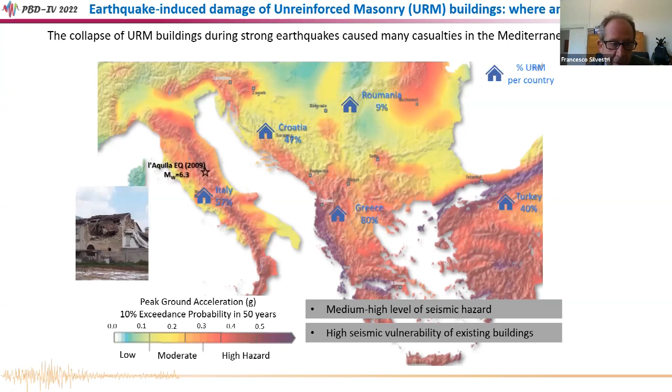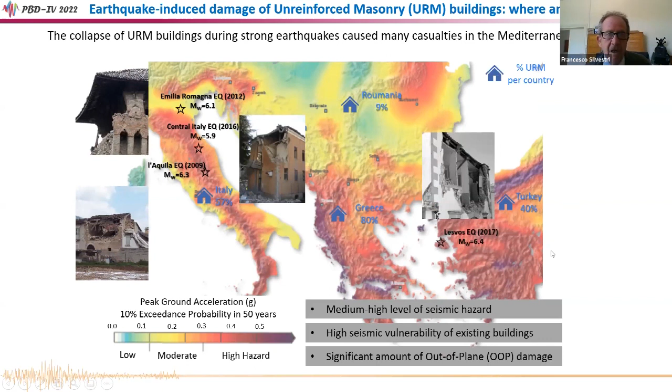Most of these buildings are made of unreinforced masonry, and as these representative pictures show, a significant amount of damage is due to local out-of-plane collapse mechanisms. Therefore our objectives were...

...to address soil-foundation-structure interaction, which is typically overlooked for this kind of building characterized by shallow foundations, so there can be a chance of considering this mechanism for a more reliable assessment of the performance of such buildings in terms of two main aspects.

The first is how to cope with methods referring, for instance, to response spectra for pseudo-dynamic analysis, which assume that the structure can be approximated with a single degree of freedom system, accounting for the complexity of masonry buildings, which makes it hard to approximate them with a single degree of freedom system.

Moreover, how can we estimate the effects of soil-structure interaction on the increase of the fundamental period of such systems, which can help for a more reliable assessment of the seismic inertial load acting on them, which can be either detrimental or beneficial depending on the part of the spectrum the period falls on.

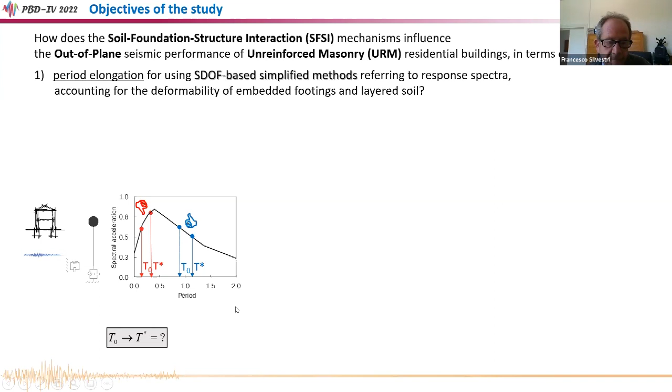So our first objective was to find a simplified method to predict the variation of the fundamental period for compliant-base models with respect to fixed-base conventional models.

The other aspect we tried to investigate was defining seismic fragility curves accounting for site amplification and soil-structure interaction, expressing the probability of attaining a given damage threshold at increasing intensity measure of the reference input motion, which must be defined and optimized to get a reliable prediction of expected damage from a synthetic parameter representing ground motion.

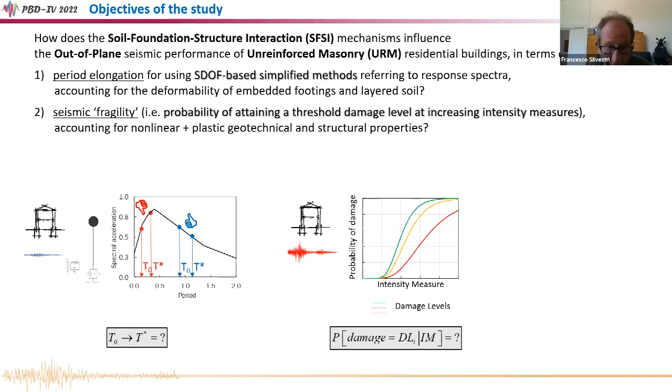In both cases we not only developed our procedures but also tested them on well-documented case studies. So for each aspect, I will resume the procedure we developed and show you the assessment on the case studies shown in these pictures.

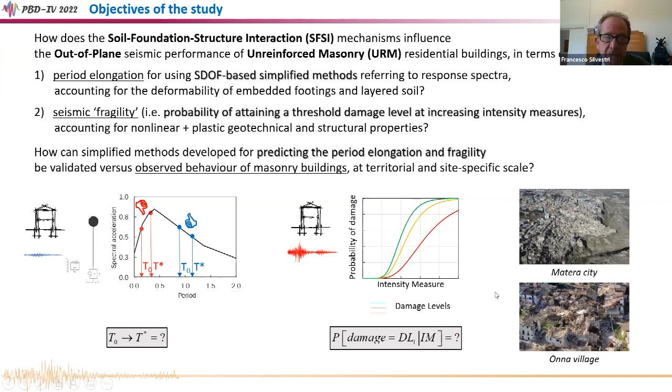The first step was to represent a cross-section of a masonry building, which is very complex due to the distributed mass and stiffness in the structural elements, the embedment of the foundation, the presence of intermediate walls, and layered soil as the foundation soil.

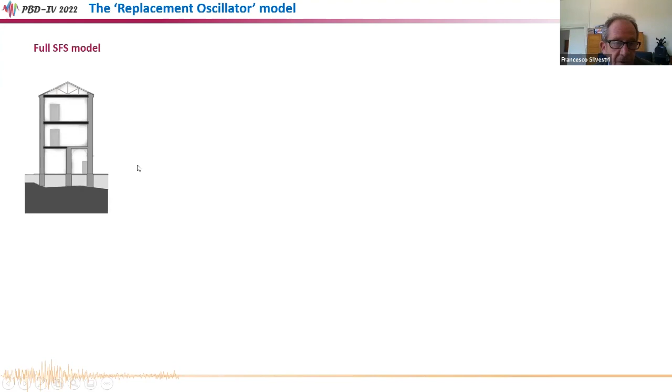So the first challenge was to find equivalence criteria to approximate this building as a compliant-base single degree of freedom system characterized by lumped structural parameters and impedance components.

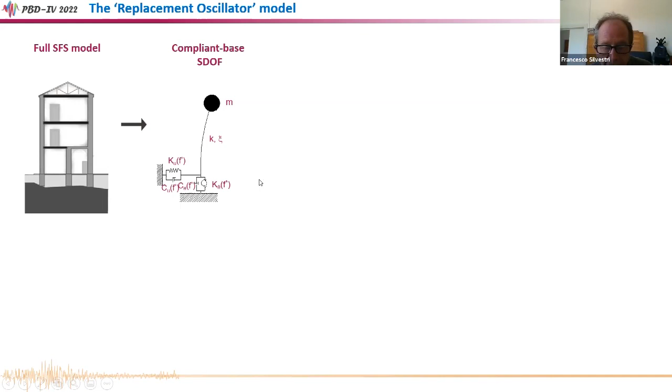These are frequency-dependent functions representing both swaying and rocking foundation-subsoil compliance, and thereafter to transform it into a replacement oscillator characterized by a fixed base and modified values of the lumped parameters.

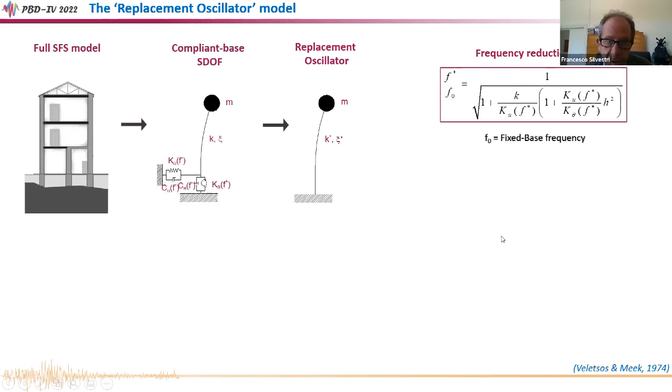An alternative procedure, suggested by the same authors, refers to simplified charts where, for a given structural slenderness ratio given by the ratio between the height and width of the structure, it is possible to predict the frequency reduction ratio by simply knowing the soil-structure stiffness ratio, defined by the ratio between the shear wave velocity—assumed, for the simplified approach, to pertain to a homogeneous soil model—and the fixed-base frequency and height of the equivalent mass of the structure.

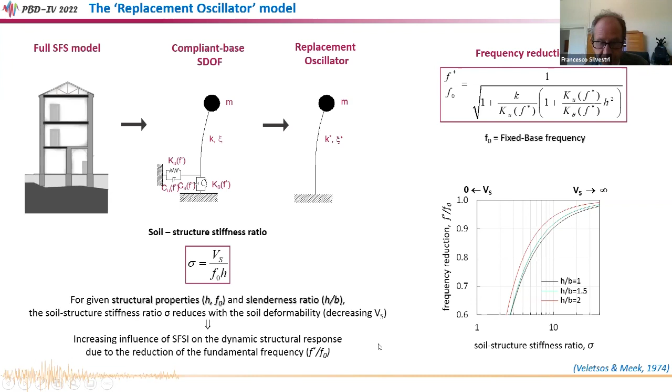So we tried to calibrate this method by means of parametric analysis. Here you can see two typical examples of building-foundation-subsoil models, with the building represented by load-bearing walls whose thickness decreases with height.

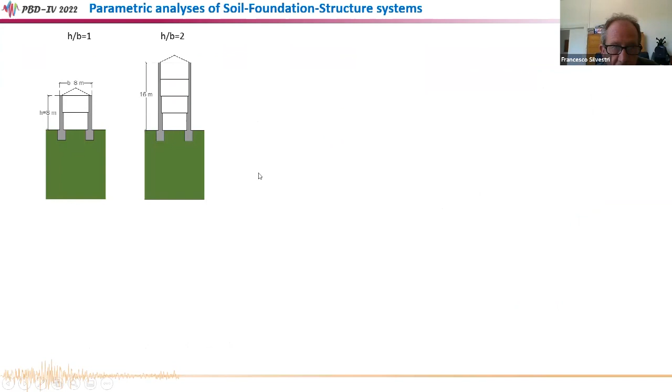The soil profile was first assumed homogeneous, characterized by shear wave velocity pertaining to the widespread ground type classification criteria suggested by international codes. For the softest soil model we also tried to assess the influence of heterogeneity in terms of the variability of shear wave velocity with depth.

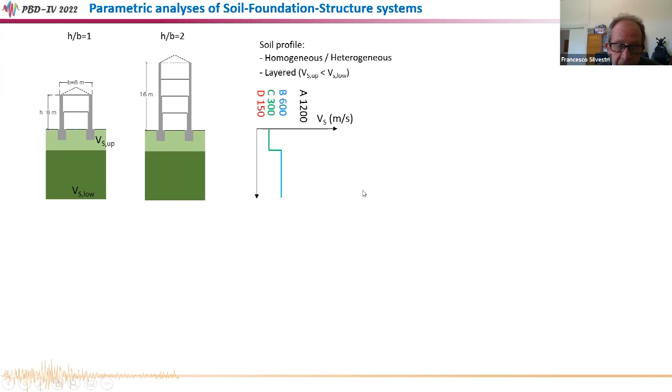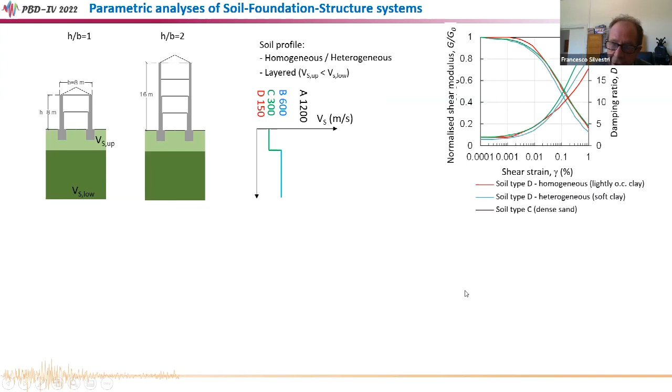And then we further consider a layered soil model to approximate actual conditions of soil heterogeneity. For the nonlinear analysis adopted for the assessment of fragility curves, we assumed a hysteretic plastic behavior for the soils.

With reference to the assumption of standard curves for defining the variation of normalized shear modulus and damping ratio with shear strain, and with reference to the material assumed for the masonry buildings, we selected three kinds of masonry types, which are the most widespread in Italy and, I guess, in other Mediterranean countries, characterized by reliable parameters representing their stiffness and strength as measured on load-bearing wall panels in the laboratories or suggested by the technical codes.

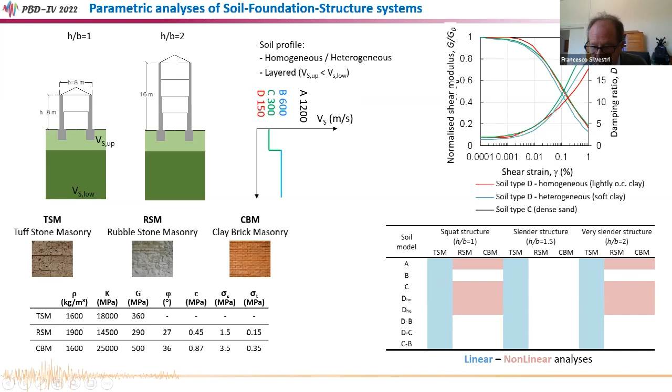So here in this table you can see the combination between all the structural slenderness ratios H over B, the type of masonry material—tuff stone, rubble stone, and clay brick masonries—and the soil models we adopted for the analysis. Not all the combinations were used for linear and nonlinear analysis, but they were enough to assess our method on the case studies I mentioned before.

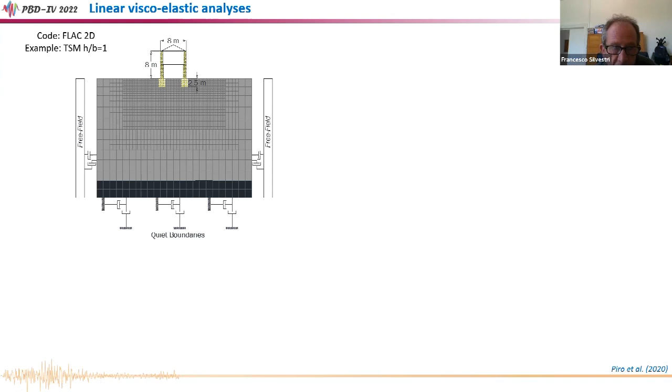So I can first show you the typical results of viscoelastic analysis. Linear viscoelastic analyses were used for a kind of dynamic identification of the frequency response of the building-foundation-soil models. Here you can see the typical mesh we adopted for FLAC two-dimensional analysis. This example is relevant to a tuff stone masonry with a rather squat shape ratio.

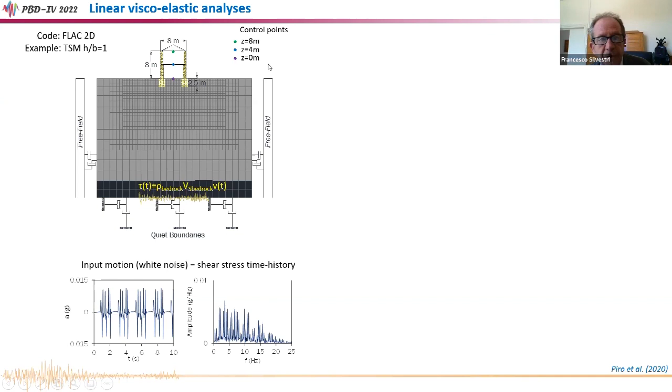And in this analysis, being the model linear, we just considered white noise as an input motion applied at the base of the soil model in terms of shear stress history. We monitored the response of the building and the soil by simply assuming three control points located on different structural elevations and at ground level. Here you can see four different examples of the time histories of the control points, corresponding to as many soil models, from top to bottom.

Here you can see the results of an analysis relevant to rigid soil conditions, which correspond to the fixed base hypothesis for the structure, stiff soil profile B, soft soil C, and very soft soil. These plots on the right represent the normalized Fourier transform of the free vibration, which helps to identify the fundamental frequency of the systems.

Please note that the soil free field frequencies computed analytically are in most cases reflected by the secondary peaks of the Fourier transform, whereas the main peaks observed here are those of the structure with a rigid base in the first case, and a compliant base with increasing deformability of the soil. You can see that although the variation is not as significant as that of the free field soil behavior, the decrease is anyway not negligible at all, which means that the soil-structure interaction is significant for this kind of model.

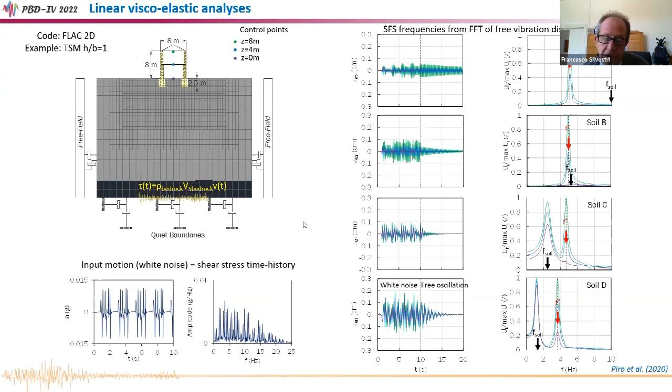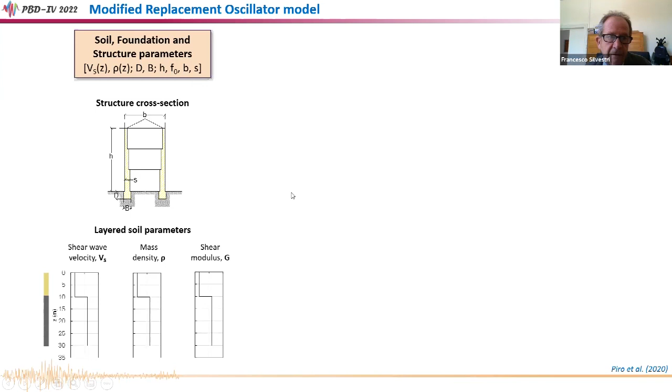Using the results of the numerical analysis, we recalibrated the replacement oscillator model. Starting from a structural and subsoil model characterized by a limited number of parameters listed on the left part of the slide, we could calibrate weighting coefficients which help in defining a weighted average of shear stiffness and inertia mass of all the materials involved in the volume significantly affected by the inertial soil-structure interaction mechanism, which consists of the embedded foundation—typically having the same properties as the load-bearing walls—and the soft soil cover.

And the underlying stiffer soil, for the case of layered soil—or in any case, even in the presence of more than two layers—we can extend this procedure to obtain the weighted average of stiffness and equivalent stiffness and mass density.

With those parameters, we could define the equivalent shear wave velocity, which can be substituted into the conventional expression of the stiffness ratio suggested first by Veletsos and Meek, in order to use the same kind of charts and obtain a prediction of the frequency reduction ratio, and therefore of the period increase ratio, which is different from that obtained by the oversimplified hypothesis of a homogeneous subsoil model.

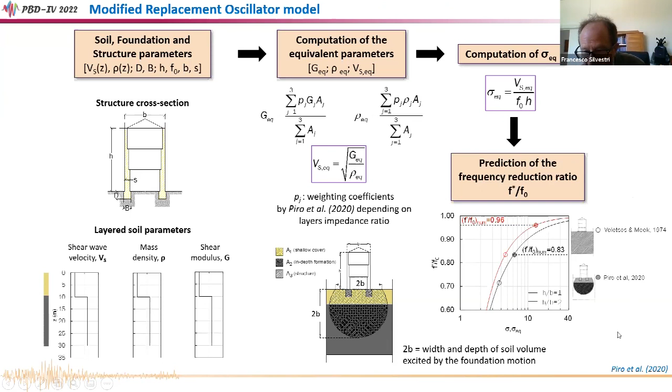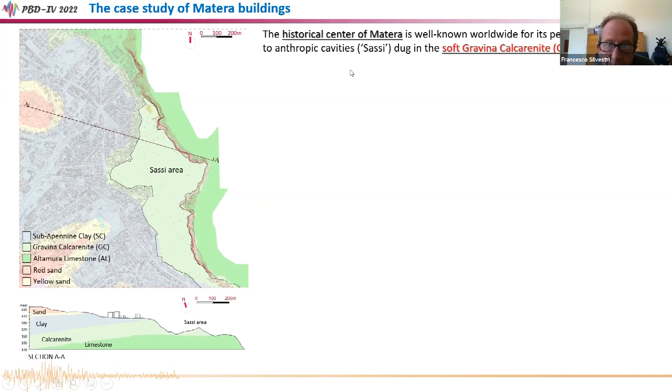So we tried to assess this procedure on a case study: the subsoil and building stock of the historical center of a very nice city in southern Italy, well known worldwide for its particular environmental heritage, characterized by the existence of a number of anthropic cavities dug into a soft calcarenite formation. But our interest was not in that area, but in the most inhabited area, built on the ridge of the Sassi areas.

And it is characterized by a high number of masonry buildings. In this area, thanks to cooperation with researchers of the National Research Council, we could rely on the availability of a number of reliable investigations in terms of borehole logs and geophysical tests.

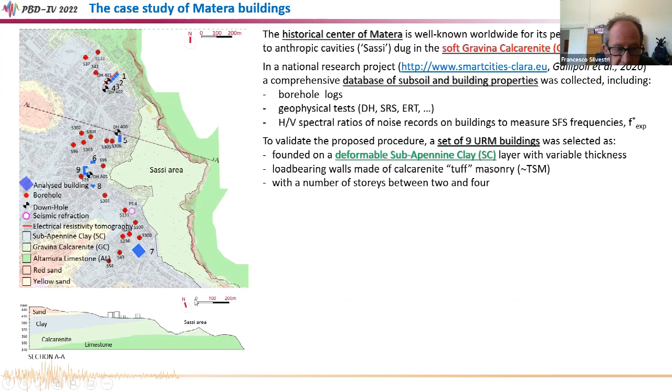We also performed our own downhole tests and electric resistivity tomography, but especially we had the availability of a high number of experimental measurements of soil foundation structure frequencies taken on buildings and processed in terms of horizontal to vertical spectral ratio. So we selected a representative sample of 9 unreinforced masonry buildings, all of them founded on the deformable clay layer lying on the calcarenite soft bedrock, with variability of clay thickness which overall increases by going away from the Sassi area.

For some of the buildings investigated by the National Research Council, founded directly on the calcarenite formation, we had the measurement of the natural frequency by horizontal to vertical spectral ratio. By fitting these measurements of experimental frequencies against the height of the building, we could get a relationship which for us represents the reference estimate of the fixed base frequency of the building with a given height.

Whereas, while plotting the experimental frequencies of the buildings founded on the clay, the frequency resulted significantly lower, and they are as much lower than the fixed base values as the thickness of the clay formation increases.

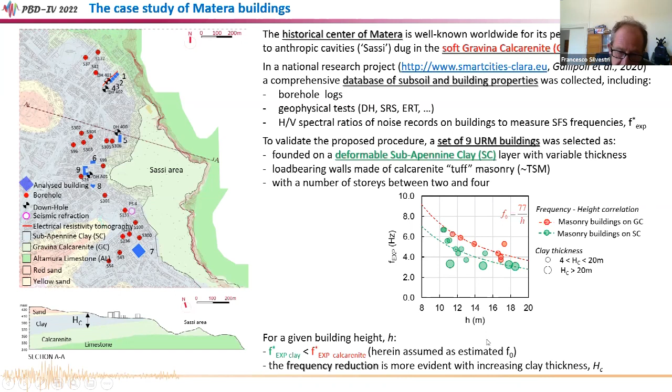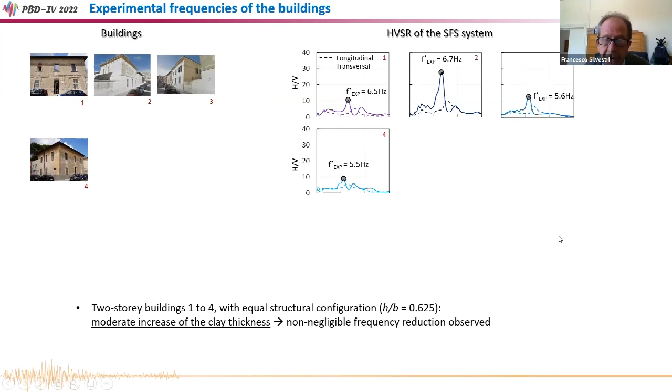Here you can see a set of pictures of the buildings we adopted, at least in this study, to assess our procedure. You can see here a set of 4 very similar buildings with the same shape ratio, which is quite low, and a moderate increase of the clay thickness of the layer. For them, even with this relatively low variability of subsoil condition, still a non-negligible reduction of the frequencies was observed.

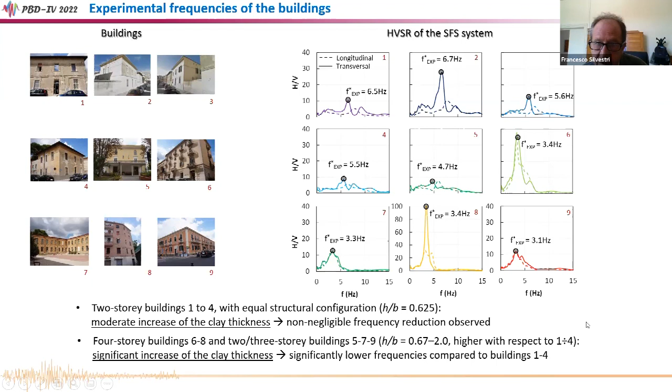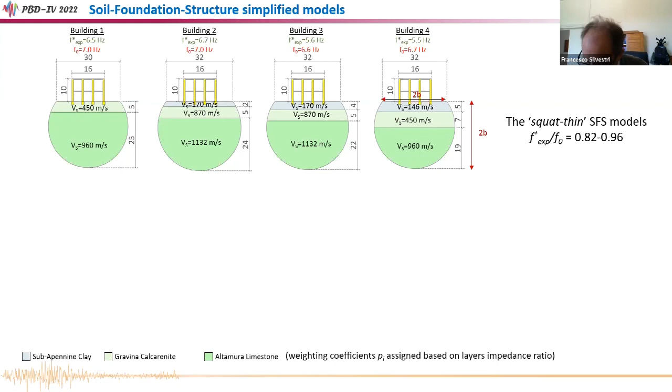Instead, for the other set of buildings, which are on average more slender than the others and characterized by higher thickness of the clay subsoil layer, the frequency reduction ratio appears on average lower.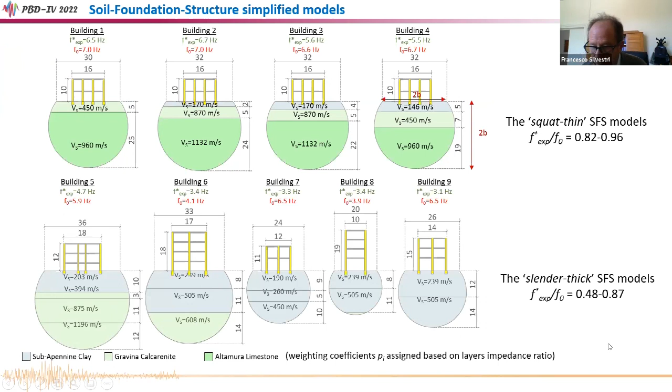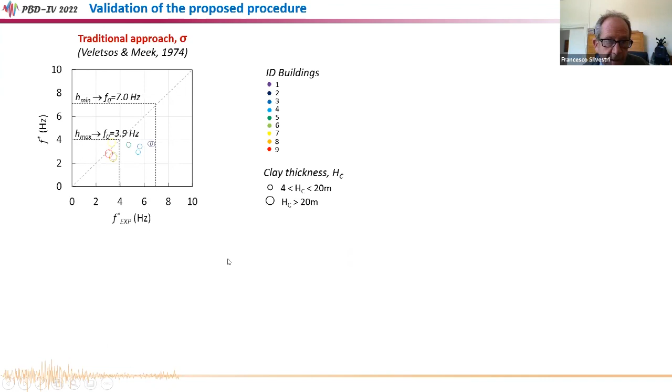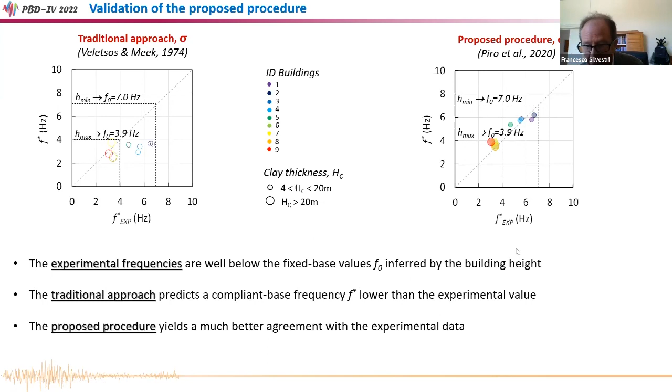So we compare in this plot the experimental frequency with respect to that predictable by the traditional approach by Veletsos and Meek. You can see that first the experimental frequency lies well below the fixed base value corresponding to their building height, which is on the order of 7 Hertz, and also that the traditional approach under-predicts the frequency of the soil foundation structure system. Instead, our method in some way can catch the right variation of the frequency, because it yields analytical frequencies much closer to the experimental values.

The second part of the study was to analyze the effect of soil structure interaction on the nonlinear dynamic response and fragility of the soil foundation structure system.

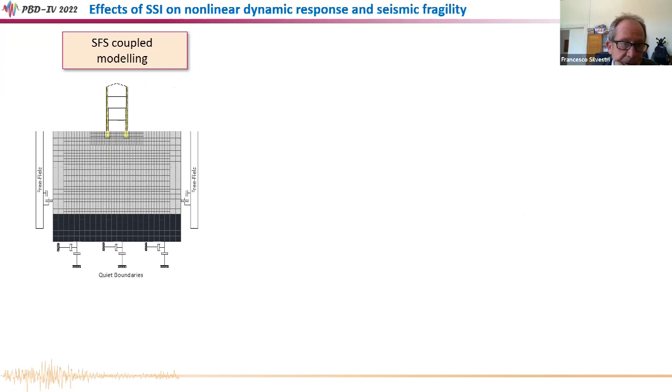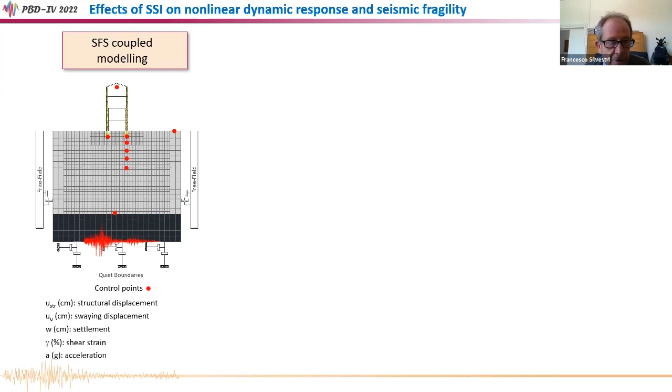This time, we consider a nonlinear behavior for both soil and structure, and also we consider actual seismic records as reference input motions. From the analysis, we monitored the soil, foundation and structure response by a higher number of control points and kinematic and dynamic quantities.

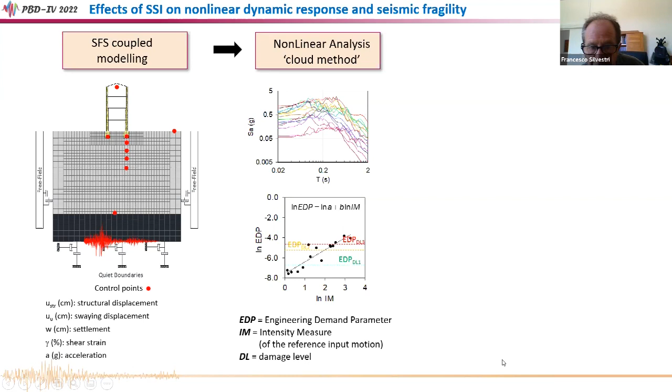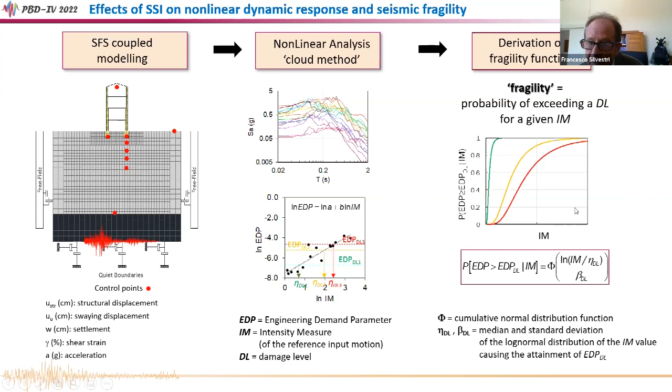By means of the regression, a linear fit of the obtained relationship, and by defining a suitable damage level depending on the selected engineering demand parameter, we could back-figure the values of the parameters eta and beta, which define the analytical expression of a log-normal distribution of probability. This defines the relationship between the selected intensity measure value corresponding to the engineering demand parameters relevant to a selected damage level, so as to obtain the conventional fragility curves.

So the first problem was to define the most suitable engineering demand parameters.

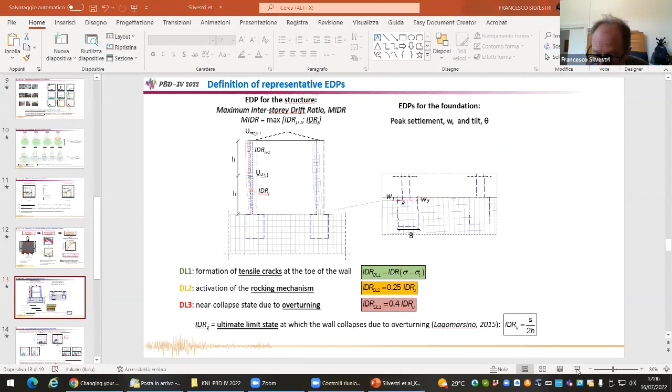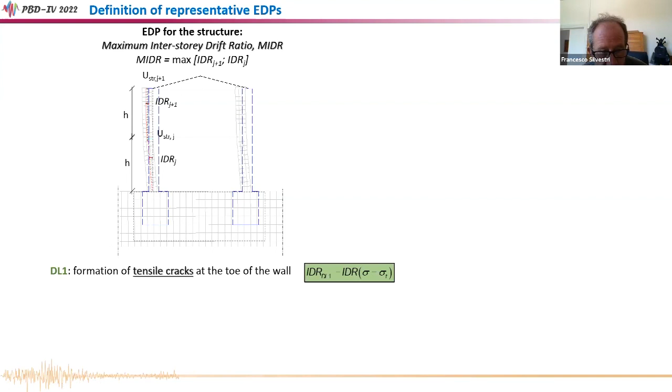First for the structure, we selected the maximum interstory drift ratio, which represents the maximum tilt among the different load-bearing wall panels in the elevation, as a representative engineering demand parameter for the out-of-plane damage mechanism. The damage thresholds were defined: the first one as the formation of tensile crack in the masonry at the toe of the wall.

The following two damage levels were defined in terms of percentage of the ultimate limit state interstory drift ratio corresponding to wall collapse due to overturning, which respectively correspond to activation of a rocking mechanism and the approach to a near collapse state due to overturning.

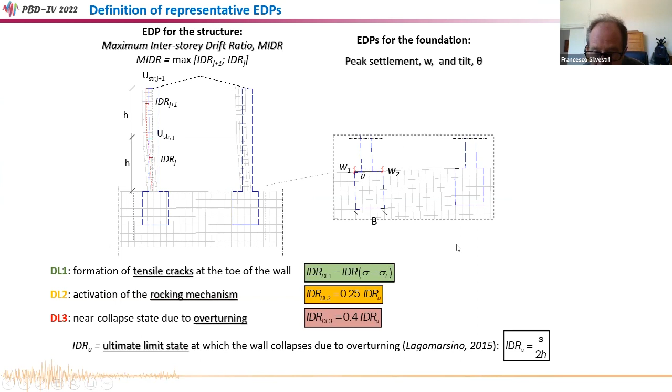For the foundation, we adopted nothing different than the typical performance parameters adopted for assessing the serviceability and failure limit state for the foundation-building system — in other words, the peak settlement and the tilt.

Here you can see the plot of maximum interstory drift ratio against peak ground acceleration, relevant to compliant-based homogeneous soft soil models of clay brick masonry buildings versus the fixed base behavior. It is clear that, being the maximum interstory drift ratio higher for the soil-foundation structure model, both site and soil-structure interaction effects prove to be detrimental for the structure.

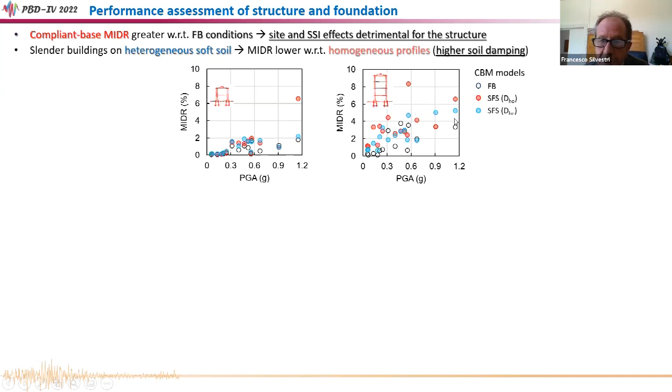If we consider a heterogeneous soil model, characterized during the shaking by high values of induced shear strain and therefore higher energy dissipation, it somehow reduces the induced movement in the structure and therefore represents a less conservative evaluation of its performance.

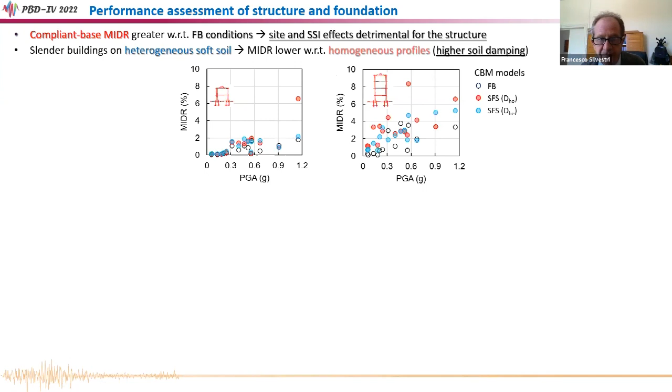On the other hand, the heterogeneous soft soil induces higher settlement in the foundations, especially for the more slender buildings characterized by more pronounced rocking motion, and even higher tilt values of the foundation.

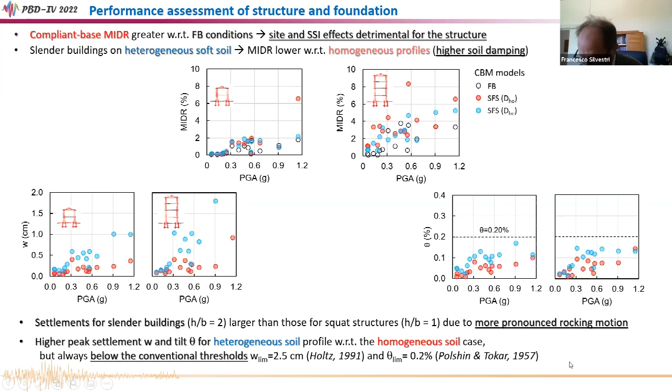But whatever the case, even for the highest peak ground acceleration considered in our set of input motions, you can note that these parameters never attain the threshold values typically assumed for settlement and tilt in the assessment of foundation-structure behavior for shallow foundations.

So in this slide, you can see the comparison of the log plots relating maximum interstory drift ratio to different intensity measures, namely peak ground acceleration, peak ground velocity, and Housner intensity, which is the integral of the spectral velocity over a wide range of structural periods.

You can see that for slender buildings on the right, whatever the intensity measure, there are higher differences between the soft soil building models — which are the red and light blue dots — with respect to the fixed base model.

This is due to resonance phenomena between the building and soil dynamic behavior, whereas the differences are less significant for squat structures. You can also check that for slender buildings, the interstory drift ratio is higher, as also shown before for homogeneous soil profiles.

Here you can see an example of how we obtained the median of the fragility curves, by simply intersecting the regression line with the damage level corresponding to each building model.

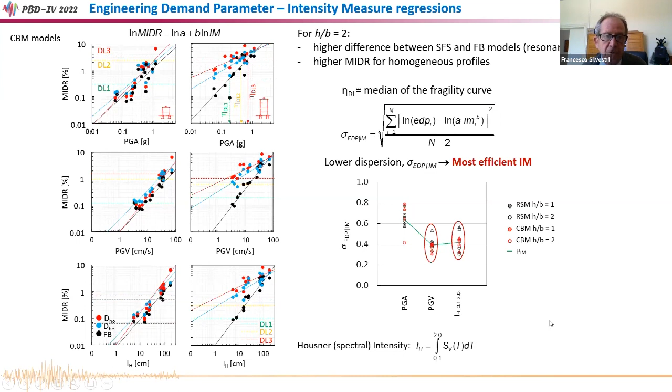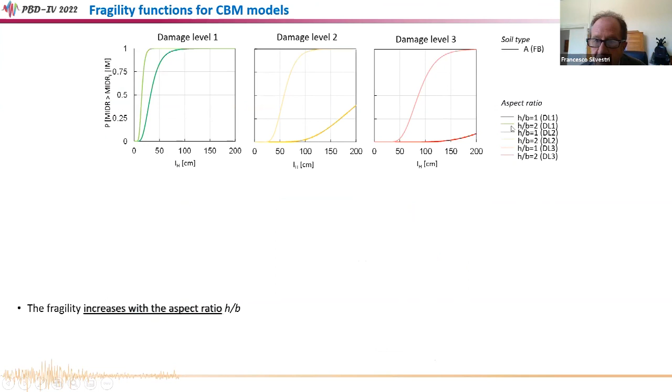Here you can see the comparison between the fixed base fragility curve corresponding to squat and slender buildings, with the latter being, of course, more vulnerable with respect to the squat ones. Depending on the damage level, the differences are more and more significant.

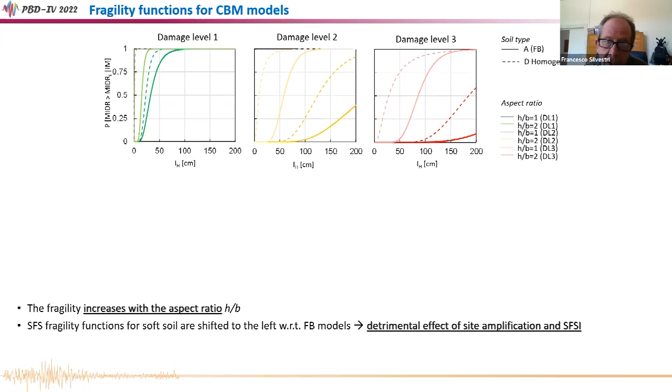If we consider a homogeneous soft soil model, the curves are even higher, highlighting the detrimental effect of both site amplification and soil-foundation-structure interaction. If we consider heterogeneous soil conditions instead, we see, as shown before, a reduction at least of the vulnerability predicted for the structures. And if we consider the peak ground velocity instead of the Housner intensity, in the second row, similar considerations apply.

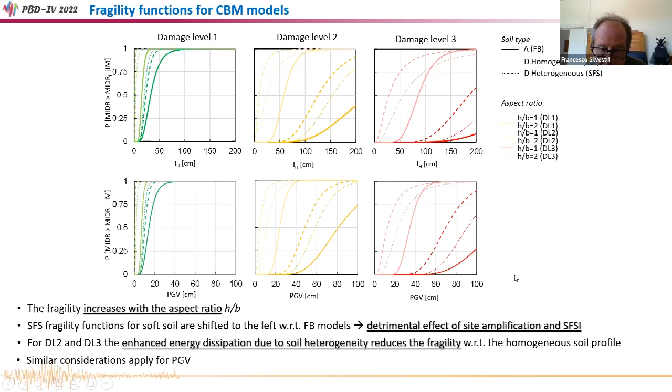As a final test of our procedure, we found a significant case study where detailed observation of the damage was available: the village of Onna, which was very intensely damaged by the L'Aquila earthquake in 2009. For this earthquake, a quite reliable definition of the bedrock motion was available in the epicentral area, so we assumed it was the same in the village of Onna.

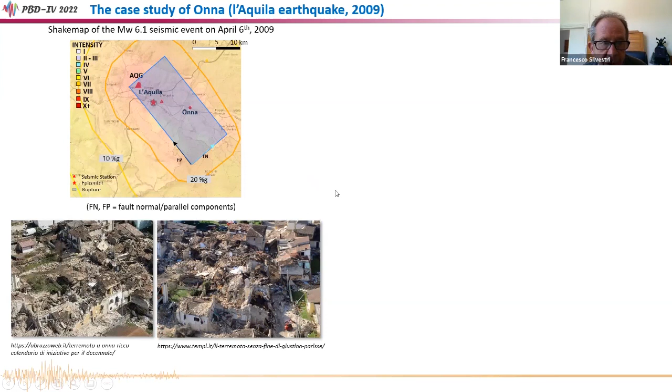From a literature paper, we found a detailed survey on the vulnerability classes of the building stock of the village, with the most significant part of buildings pertaining to the rubble stone masonry class we considered in our parametric study. We also could rely on a measurement of shear wave velocity profile obtained by surface wave methods, and therefore we could classify this soil type as a homogeneous soil among those we considered in our parametric analysis.

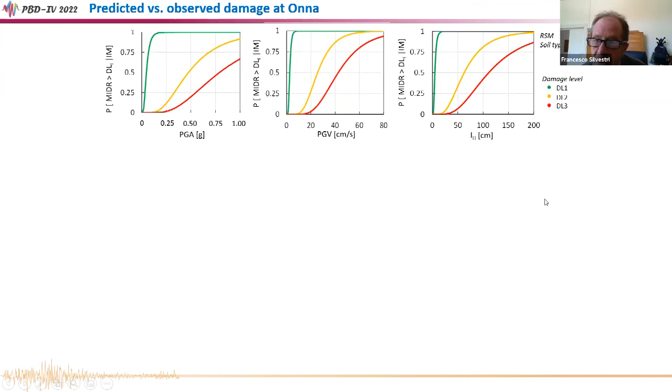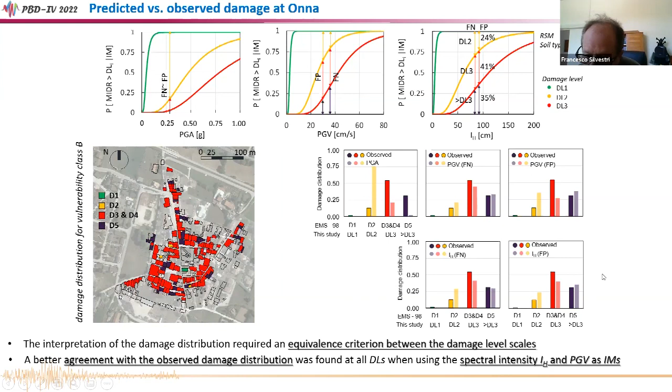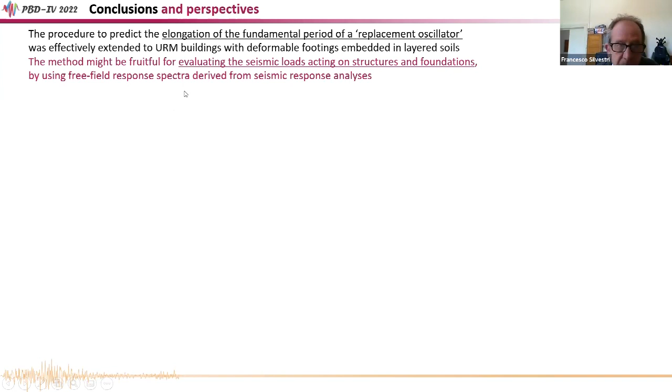So we think we can resume the results of this study with a few bullet points. First, we could effectively extend the procedure for predicting elongation of fundamental period to even complex geometries and mechanical models of unreinforced masonry buildings. This can be a useful tool for evaluating the seismic load acting on structures by simply referring to capacity demand models and response spectra derived from seismic response analysis of subsoil classification. The assessment of the procedure on measurements taken in the urban center of Matera was satisfying.

But we cannot stop here. We would like to further assess and extend the method for irregular structural geometries. We started from a very simple transversal two-dimensional model of soil and structure, and we should account in some way for soil nonlinear behavior and energy dissipation.

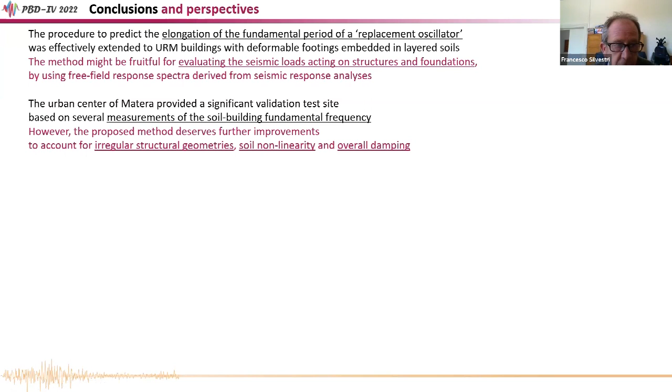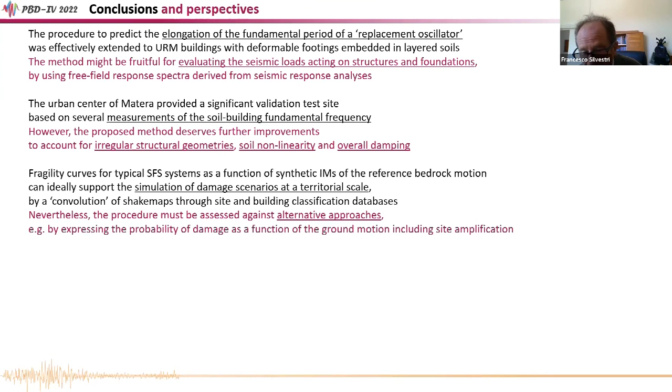The fragility curves we developed can be helpful for simulating damage scenarios at territorial scale, if we can convolute simulated shake maps through site and building classification databases. But we should assess this procedure against alternative approaches, those preferred by structural engineers, such as expressing a probability of damage as a function of ground motion including site amplification, but neglecting soil structure interaction effects. Who knows which one works better?

Finally, the consistency observed between prediction and observation in the Onna village is just the first step of assessment of the method, but we wish to try further assessments on sites where on-site seismic records and detailed inventories of damage mechanisms can be available, if any.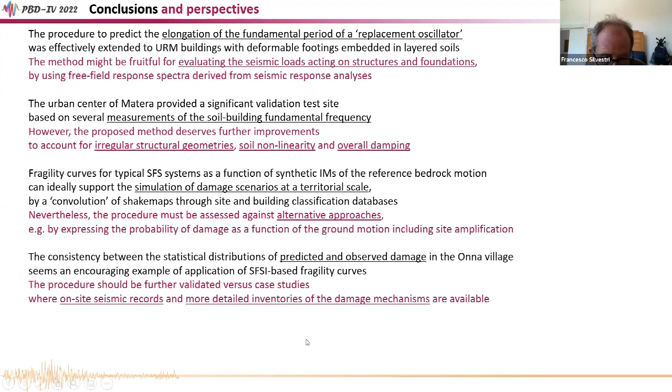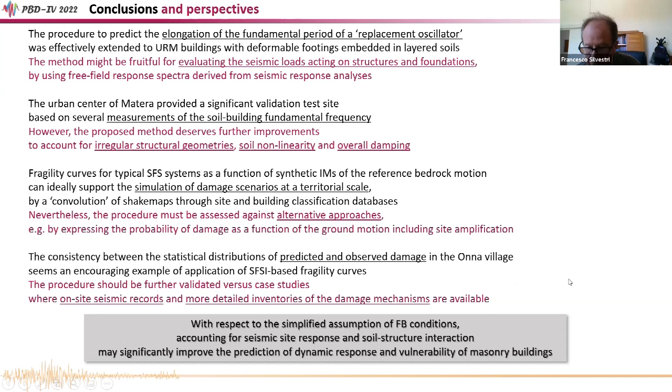To summarize, with reference to the oversimplified assumption of fixed base condition, we think that accounting for seismic response, which is trivial, and soil structure interaction, which is less trivial, can significantly improve the prediction of dynamic response and vulnerability of masonry buildings. Thank you very much, I'm sorry if I am out of time.

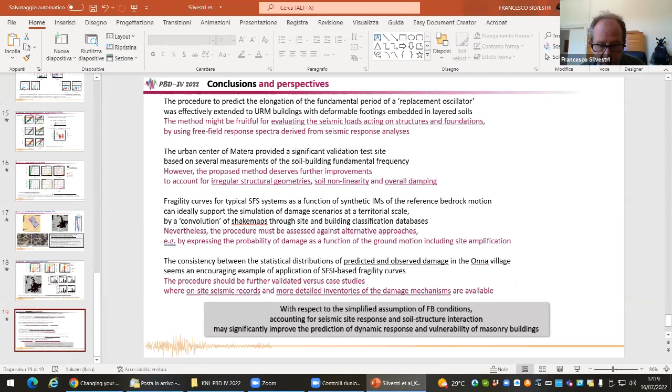Professor Pitilakis: I know this work, so I have no questions, just a comment. It is an ongoing work about the importance of site conditions and soil structure interaction when we are going to calculate and estimate the vulnerability of structures. Fixed base structures present some deficiencies in this case, and the work nicely presented by Francesco lies exactly on this—how important is finally the soil structure interaction and site effects. If they are combined, probably they are even more important, but it is important to check one by one. I think this work is pretty much interesting.